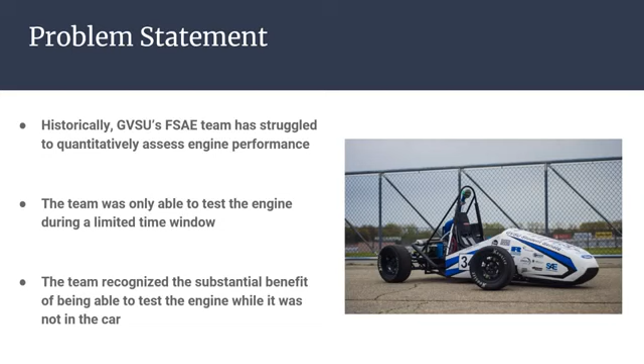Historically, the team has struggled to quantitatively assess engine performance and was only able to test the engine during a limited time window. This dynamometer will allow the team to test the engine during a longer period of time and optimize more engine parameters. An engine dynamometer, commonly referred to as an engine dyno, is a machine which measures power output of an engine. The dyno is designed to apply a load to the engine at various RPM and measure the resulting force output. We opted for the eddy brake dyno design.

This dyno type was chosen because of its ability to hold a steady force over a wide RPM range, the ability to instantaneously change the resistive force, and the lower price point when compared to an electric motor dyno. Once completed, the GVSU Formula Racing team will use their engine dyno to adjust engine settings and determine the effect of such changes on engine performance.

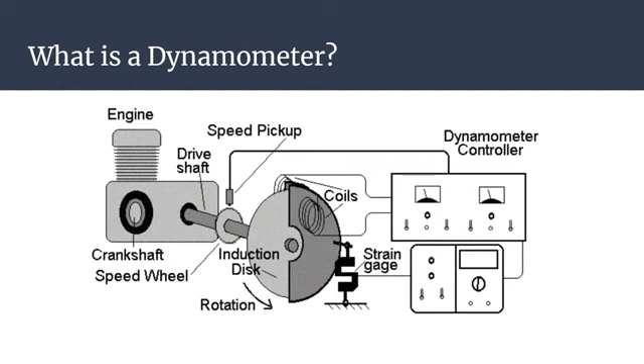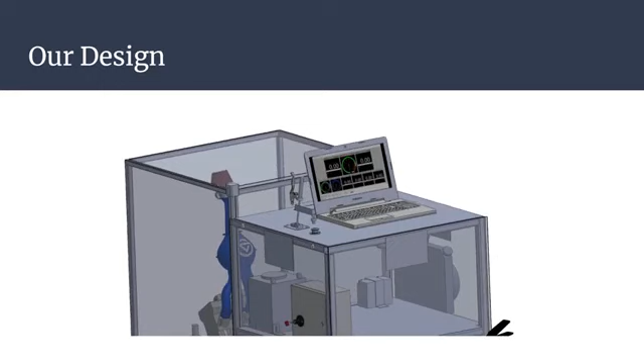Initially, the engine will be installed as shown. Then, a protective cage will be attached for user safety. Once everything is connected, the user will operate the dynamometer from the rear of the cart. Here they will have access to mechanical engine controls and a USB plug-in to connect their laptop to onboard electronics.

This dynamometer should be capable of taking measurements up to 140 pound-feet of torque and 100 horsepower at the output shaft while meeting predetermined accuracy and precision requirements for the measurements taken. It should be capable of testing a variety of engines which fit within a 24-inch cube, and once the engine is connected, should only require one person to operate.

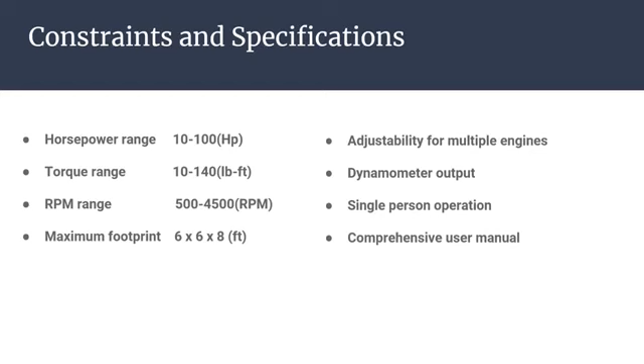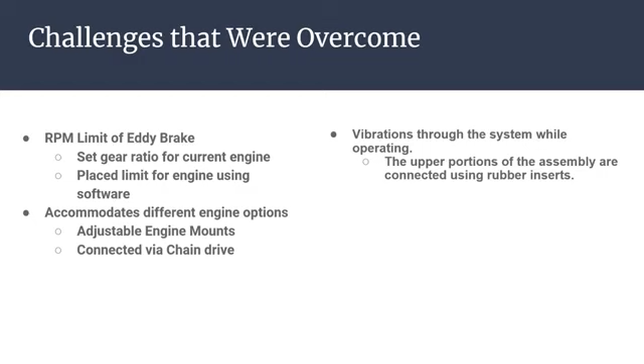While developing the dynamometer, a gear ratio was set in order to keep the eddy brake under its RPM limit. Additionally, adjustable engine mounts were used in order to allow the design to accommodate different engines, and the upper portions of the assembly are connected using rubber inserts to mitigate vibrations.

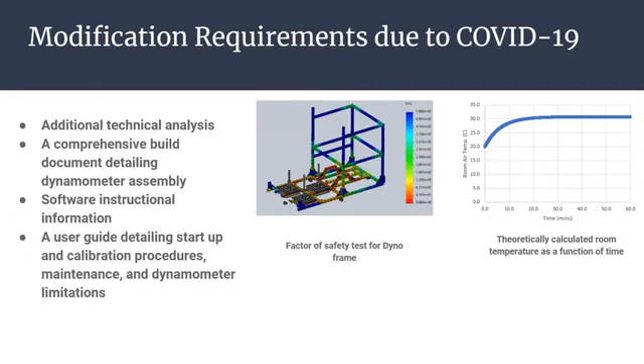Due to the coronavirus outbreak, we were unable to build the dyno. In lieu of building the dyno, the design was analyzed for its stress and heat responses during operation. Additionally, a step-by-step document was created to enable the Formula team to perform the build after restrictions have been lifted. While we were unable to build the assembly, the simulations performed show that the design will meet or exceed all critical criteria. Thank you for watching, and we look forward to your questions during the live session on Design Day.